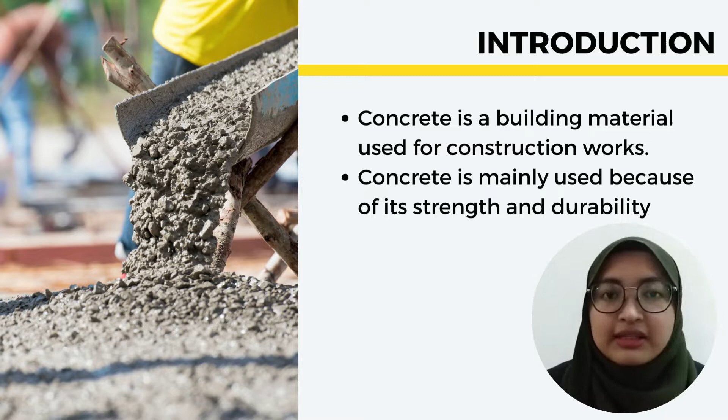First of all, concrete is an important and extensively used building material used for construction works. Concrete is the first option when building something to have a long useful life, which makes it one of the most used materials in construction. It is mainly used in heavy construction because of its strength and durability.

Despite every attempt already used in the search for its improvement, it still presents considerable failure. No matter how carefully the concrete is mixed or reinforced, it eventually ends up cracking by expansion and contraction at some point, which results in an unattractive appearance and can also compromise the entire structure of the building.

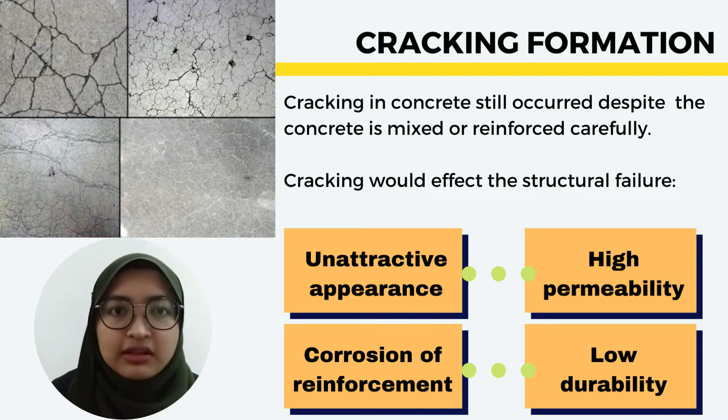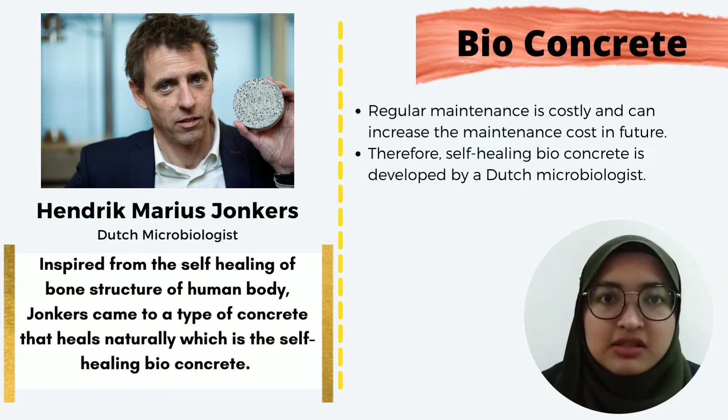To solve the problem of cracks in concrete structures, researcher Hendrik Marius Jonkers observed that the human body, including the bone structure, can heal minor damage on its own. Through this inspiration, Dutch microbiologists have developed a bio-based, safe regenerating concrete that can overcome cracks and also increase durability of structures. The use of this new material in new construction and maintenance of existing structures will substantially reduce the cost of preserving concrete structures.

The bacterial cells are potential admixtures in concrete that help in enhancing the mechanical performance of concrete. So, what are the properties of bioconcrete? According to Kumar et al. in 2019 in his paper entitled Properties of Bioconcrete, the workability test of bacterial concrete resulted in 90 mm of slump value. This shows that bioconcrete has a high workability.

The biological treatment of the cement composite results in crack sealing. Therefore, bioconcrete has the ability to heal microcracks with the help of bacteria and a healing agent. Next, bioconcrete has low permeability, as water could not flow through the microcracks. Next, bioconcrete has a high compressive strength. After 91 days, the compressive strength of bioconcrete reached maximum strength.

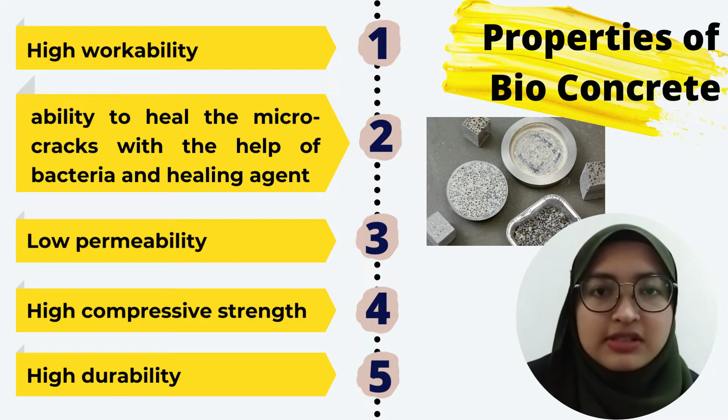Compared to conventional concrete, the bio-based cement composite has higher durability as its mechanical properties are improved. Additionally, self-healing concrete also helps in reducing maintenance and repair costs. The basic concept will cover 4 components, which are type of bacteria, testing method, application, and factors affecting.

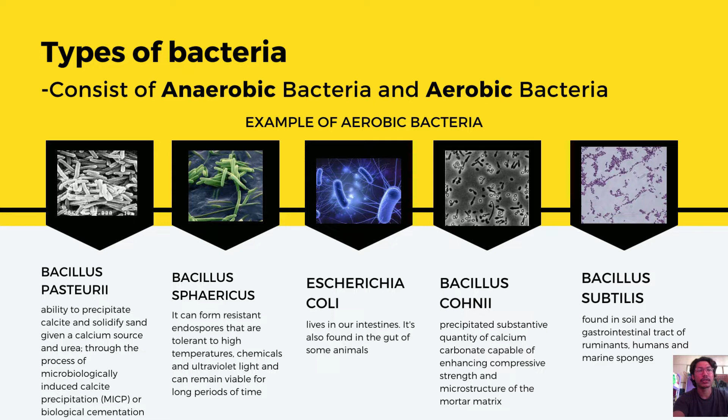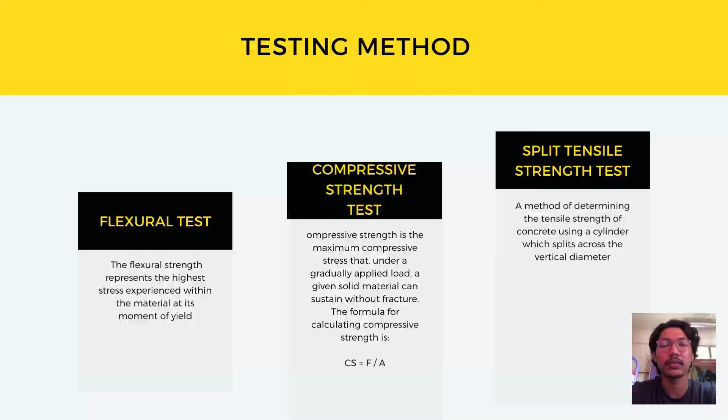Types of bacteria consist of anaerobic bacteria and aerobic bacteria. Examples of aerobic bacteria are Bacillus pasteurii, Bacillus sphaericus, Escherichia coli, Bacillus cohnii, and Bacillus subtilis. The testing methods for bioconcrete consist of 3, which are flexural test, compressive strength test, and split tensile strength test. Bioconcrete can be applied to existing buildings in the form of spray, prevents reinforcement from corrosion, reduces permeability in concrete, and brings great advantage to marine and submerged structures.

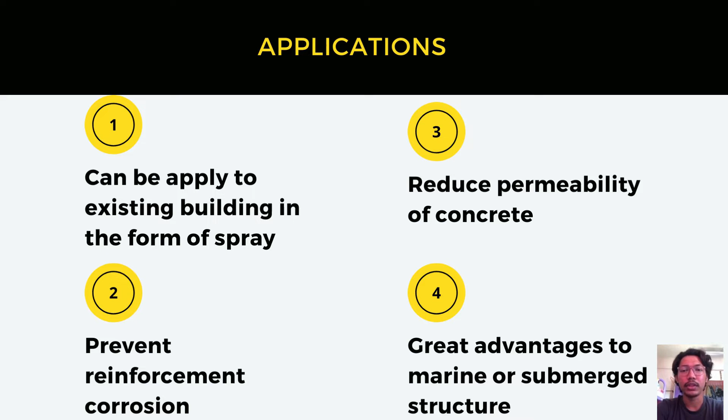Factors affecting bioconcrete consist of 4 factors: size of crack, age of concrete and crack, temperature, pressure and healing time, and the presence of water and air. For the size of crack, it is very difficult if the size is too big. Next, for the age of concrete and crack, the effectiveness of self-healing decreases as the age increases.

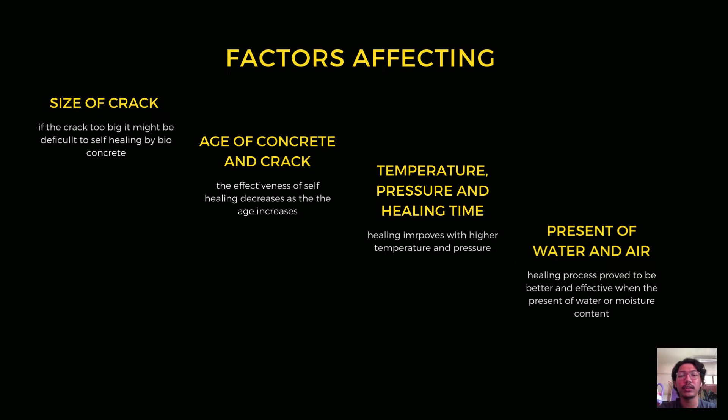Next is temperature, pressure and healing time. The healing improves with higher pressure and temperature. Lastly, the presence of water and air. The healing process will be better with the presence of water and moisture content.

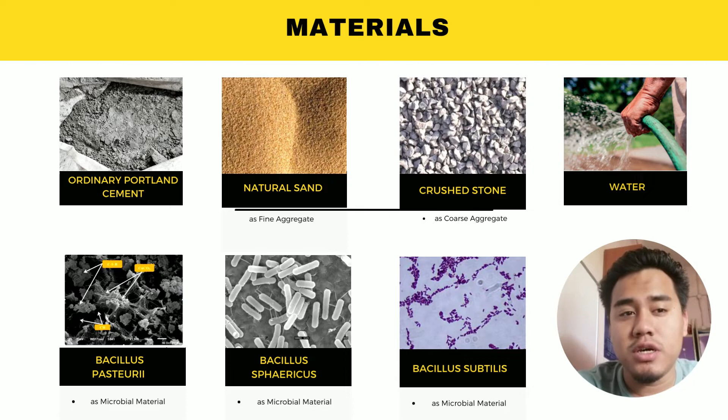Hi, my name is Mohamad Hafiz. I would like to share about the materials used in this case study. First there is ordinary Portland cement, natural sand as fine aggregate, crushed stone as coarse aggregate, and water. For the microbial material, there are 3 types, which are Bacillus pasteurii, Bacillus sphaericus, and Bacillus subtilis.

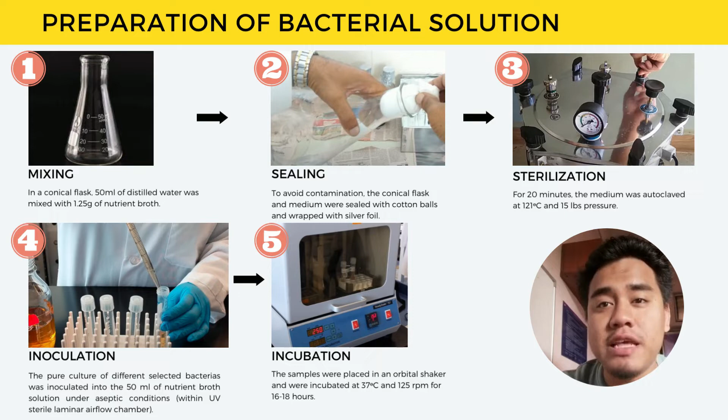The pure culture of different selected bacteria was inoculated into 50 ml of nutrient broth solution under aseptic conditions within a UV sterile laminar flow chamber, and the final preparation is incubation. The samples were placed in an orbital shaker and were incubated at 37 degrees Celsius and 125 rotations per minute for 16 to 18 hours.

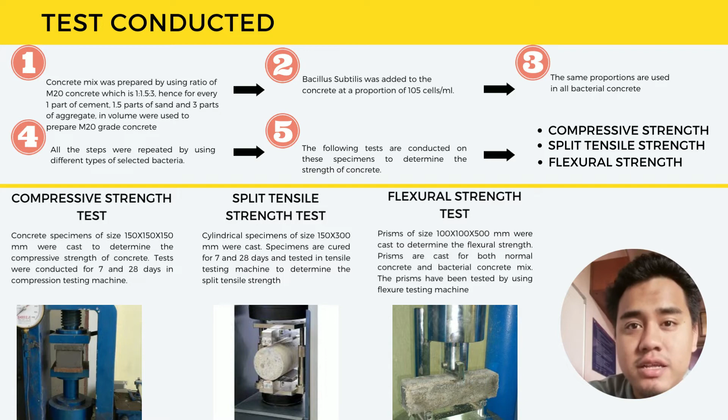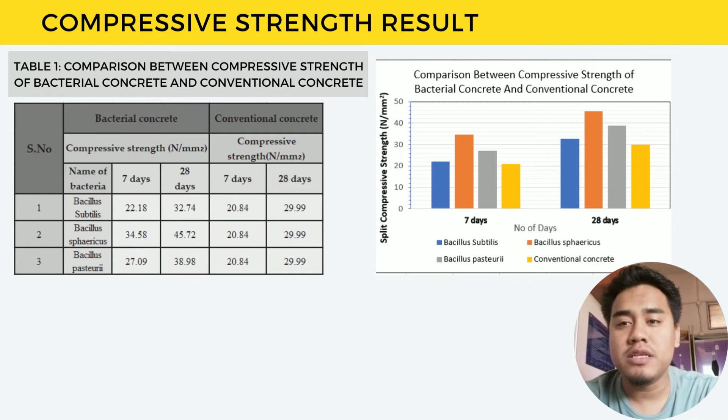The following tests are conducted on these specimens to determine the strength of concrete: compressive strength, split tensile strength, and flexural strength. Compressive strength result. Table 1 shows the comparison between compressive strength of bacterial concrete and conventional concrete. 3 microbial materials were tested, which are Bacillus subtilis, Bacillus sphaericus, and Bacillus pasteurii, along with the conventional concrete. The result showed that Bacillus sphaericus has the highest compressive strength during 7 days and 28 days of curing, which are 34.58 N/mm² and 45.72 N/mm² respectively.

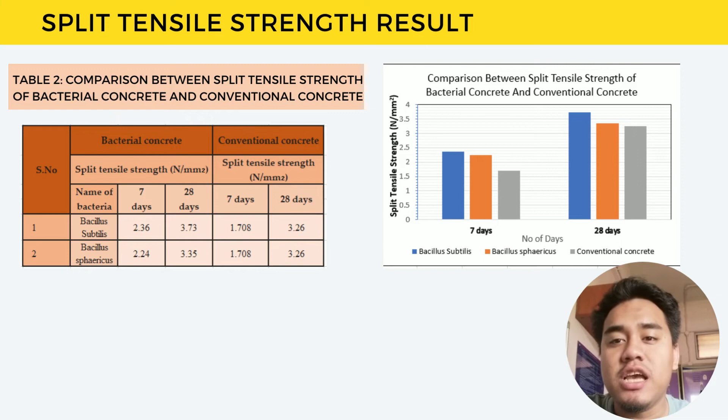Split tensile strength result. Table 2 shows the comparison between split tensile strength of bacterial concrete and conventional concrete. 2 microbial materials were tested, which are Bacillus subtilis and Bacillus sphaericus, along with conventional concrete. The results showed that Bacillus subtilis has the highest split tensile strength during 7 days and 28 days of curing, which are 2.36 N/mm² and 3.73 N/mm² respectively.

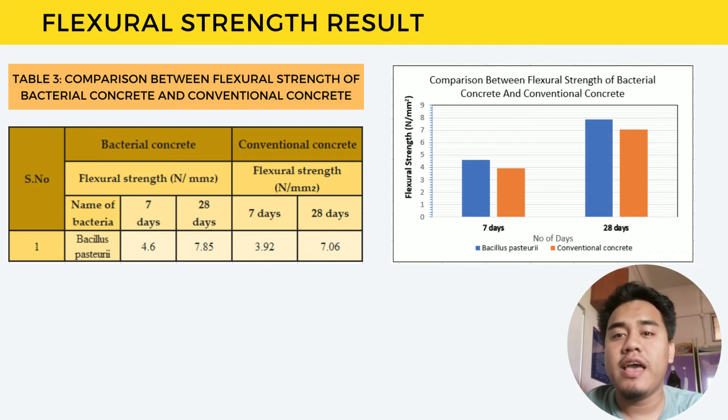Flexural strength result. Table 3 shows the comparison between flexural strength of bacterial concrete and conventional concrete. 1 microbial material was tested, which is Bacillus pasteurii, along with conventional concrete. The results showed that Bacillus pasteurii has the highest flexural strength during 7 days and 28 days of curing, which are 4.6 N/mm² and 7.85 N/mm² respectively.

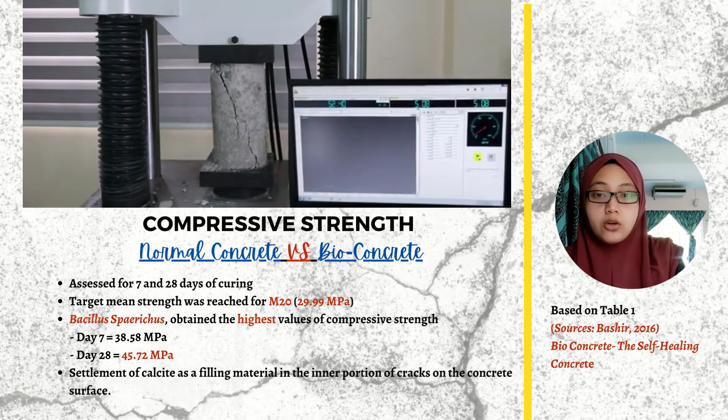The compressive strength was assessed for 7 and 28 days of curing of the concrete specimens. The target mean strength was reached for M20 grade conventional concrete, which is 29.99 MPa. There is an improvement in compressive strength for all types of bacteria used compared to the normal concrete. However, the result shows that Bacillus sphaericus obtained the highest value compared to other bacteria, which is 38.58 MPa at day 7 and 45.72 MPa at day 28. The compressive strength was regained up to 52.42% higher at day 28 compared to normal concrete due to settlement of calcites as filling material in the inner portion of the cracks on the concrete surface.

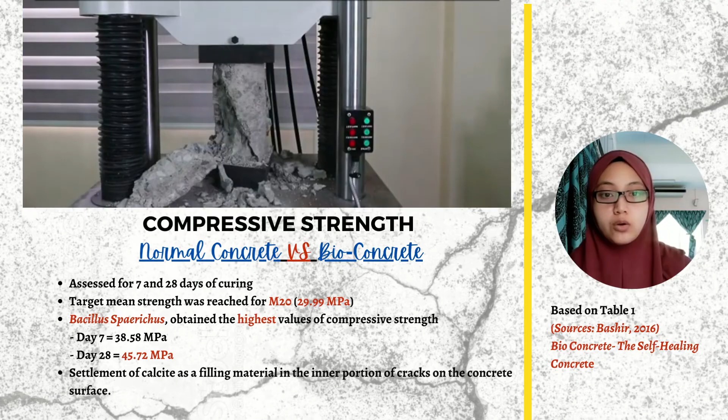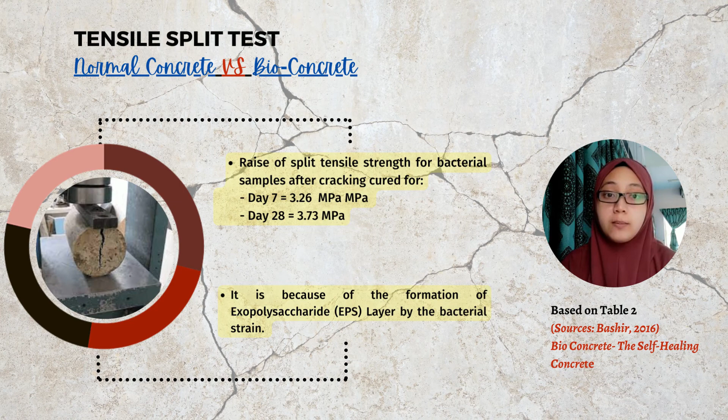Similar to the compressive strength, the split tensile strength was computed for 7 and 28 days of curing. There is a raise of 38.17% of split tensile strength for the bacterial sample of Bacillus subtilis after curing for 7 days and 14.14% for 28 days compared to the normal concrete. It is because of the formation of the EPS layer by the bacterial strain. The split tensile strength for day 28 increased to 3.73 MPa from 3.26 MPa after crack healing.

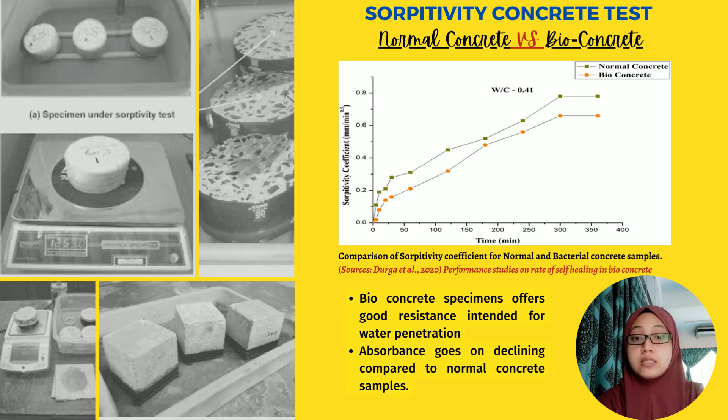Sorptivity test is an indirect measure of permeability of concrete. It is to monitor water penetration resistance of the concrete. It resulted that the bioconcrete offers more resistance against passage of water into concrete, hence the porosity decreases. The precipitates produced by the bacteria in the pores of the concrete improve the denseness of the concrete specimens, which leads to the decrease in sorptivity values.

From the study, we can conclude that bioconcrete is a concrete which can heal itself from minor cracks, which can reduce the maintenance cost and increase the age of the concrete. The presence of water and air will help the healing process be more effective. The study shows that the strength of the bioconcrete is higher compared to normal concrete in the form of compressive strength, split tensile strength, and flexural strength.